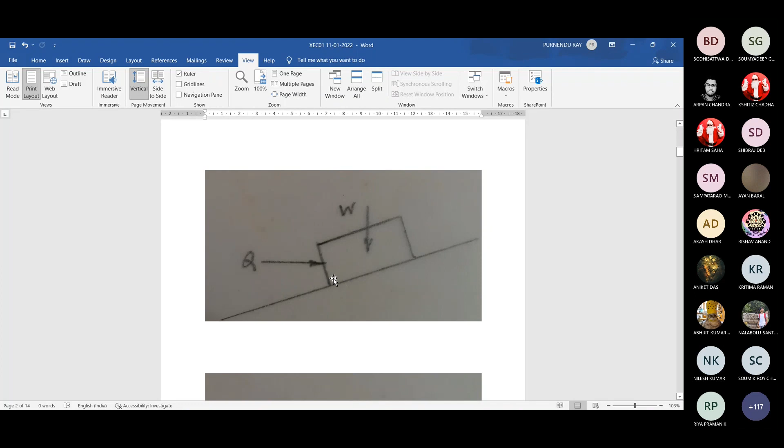And in this case, automatic sliding is not possible due to this low angle theta, which is less than phi. We are giving some motivation for downward movement, and when it reaches that limiting force, it starts sliding down. Now this force is not like the other one, where it can slide upward after reaching some threshold value. Here it is not possible. So we must understand these two different cases.

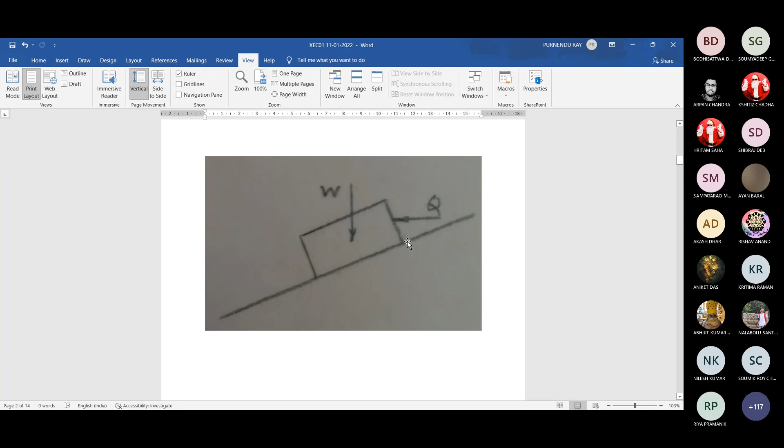Here the angle is low, not sliding down. Angle is high, sliding down automatically. It has been stopped by some minimum value Q. We increase the value Q, then after some time it starts sliding upward. For this case, it is not sliding down. This force Q is applied horizontally to generate that sliding motion.

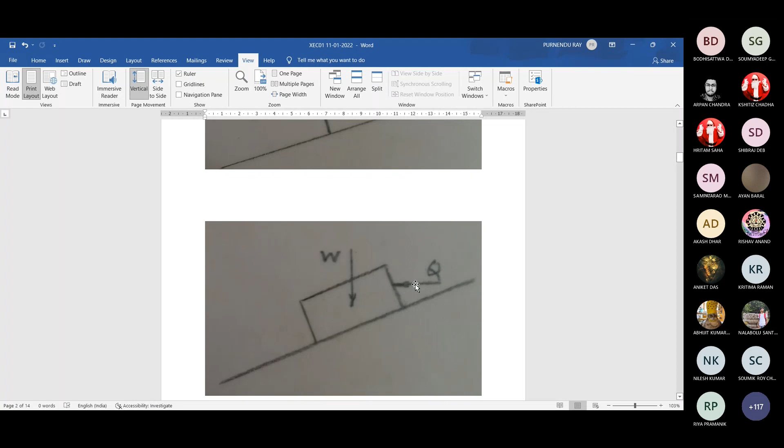Now, for these two simple situations, can you write down the equations of equilibrium and solve them? For some given numerical value of W, some numerical value of this angle theta, and the friction angle phi, those are given. So first step, find tan inverse mu.

You check that angle. Suppose some friction coefficient is there, not tan inverse phi, that mu. So tan inverse mu will give you the value of the angle of friction. So compare phi with theta. If theta is less than phi, you go for this situation. If it is more than, you go for that to stop it.

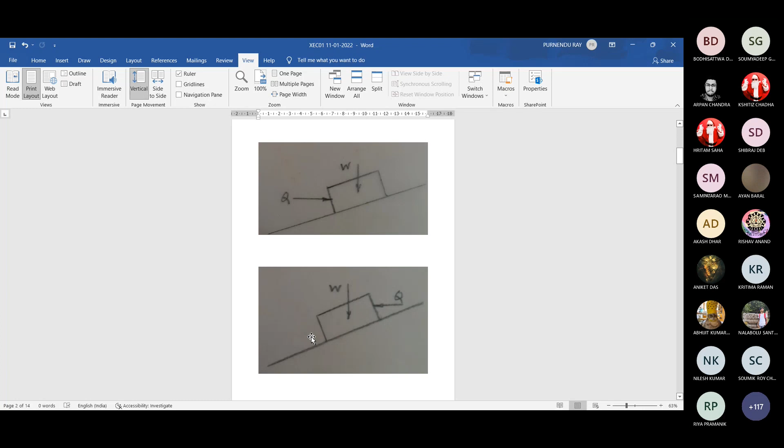Then if you require some more value to start sliding upward, you simply generate those equations of equilibrium. The only thing is the direction of the friction force, either downward or upward along the plane. That's all. And here it is only one situation. It is not sliding down automatically. This is the helping force, and find the minimum force to help it slide down. Okay. Now please go through all such problems on friction.

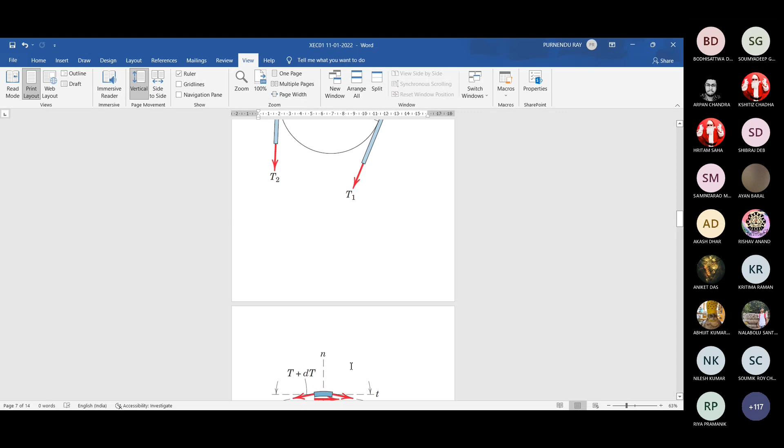Then we discussed belt friction. I hope you have gone through this free body diagram, the equations of equilibrium, the derivation and the final relation. T2 divided by T1 is an enormously high value, e to the power mu beta. Mu is the coefficient of friction and beta is the wrapping angle between the belt and the drum, the angle of contact at the center. And you will find varieties of problems on this.

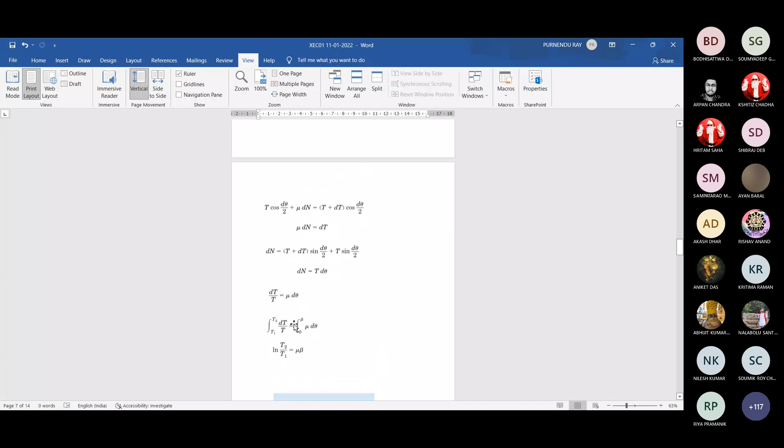Please do some practice, but before the examination it will not be wise for you to, I'll not say waste time, just don't use your time there. It will be an inefficient and ineffective use, because this is not in your syllabus for the exam on the 15th. Next, we are talking about the screw jack.

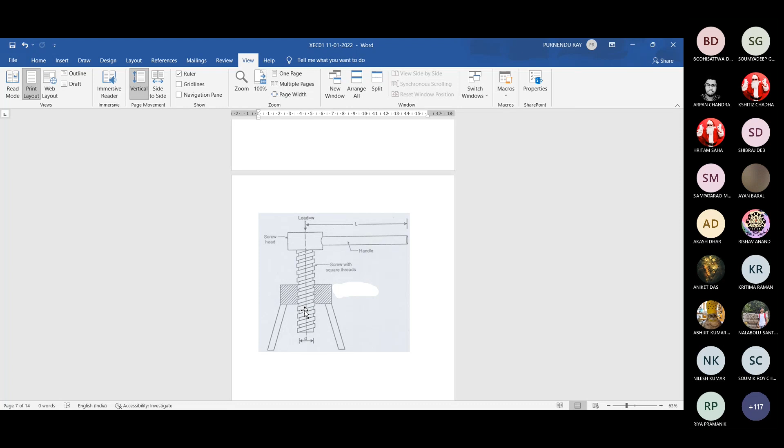Now I will advise one thing about study habits. Normally some people have a household library, but most of us have very few books at hand at home. Normally we go to the school libraries, and unfortunately you cannot avail the library facility of your institute, NIT. But at least the big facility is there, that is the internet, and from there you can get so much very useful information. One search you should do, not right now: different types of threads.

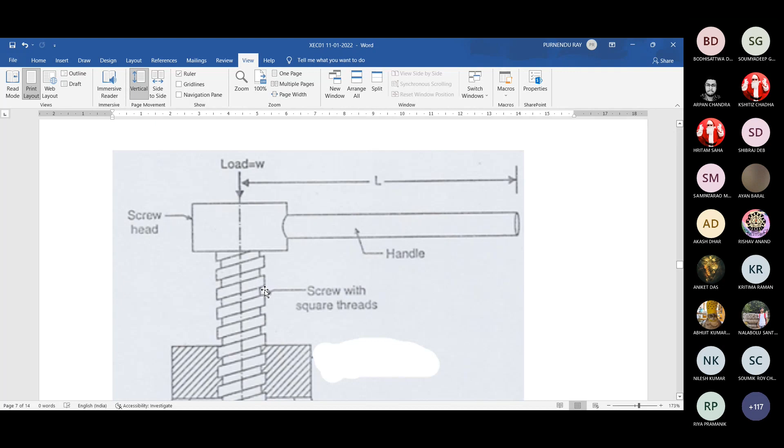And here I'll just make it bigger. Can you see this word written? Square - screw with the square thread. There are different types of threads, and particularly we use the square thread, so that the depth of the thread and width of the thread are normally the same, giving it a square shape.

So you can go through some YouTube video on how different screws and threads are formed, internal, external, etc.

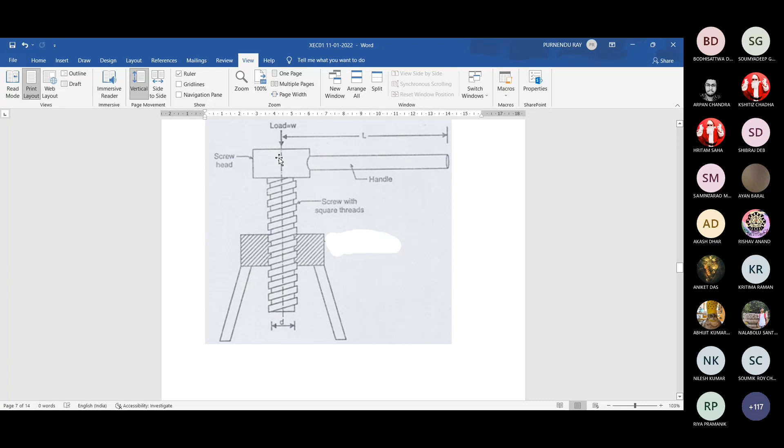What will happen then? A continuous line marked on the outer surface of that cylinder or tube, but the starting point does not come back to its finishing point like the previous line, because along with this circular motion or rotational motion about this axis, there is some linear motion along this axis also. So it comes here for this movement and moves here, continuing again. That is the mechanism by which we get this continuous curved line, the helical line, or the thread lines, the screw lines. That is how we make this thing.

Now when you open this, you will get, like the previous case, the flat open paper with 1 inch divided by width of this paper, that slope. Now in this case, what about the slope of these threads?

Again, that 1 inch like thing divided by this. Now if it is some opened up tube, then what about this length? It is twice pi r, 2 pi d by 2, circumference. Okay, so it is twice pi r. And what about this distance? 1 inch.

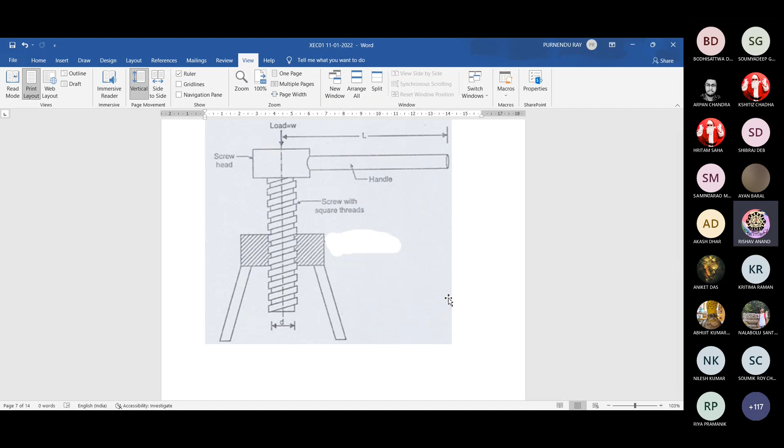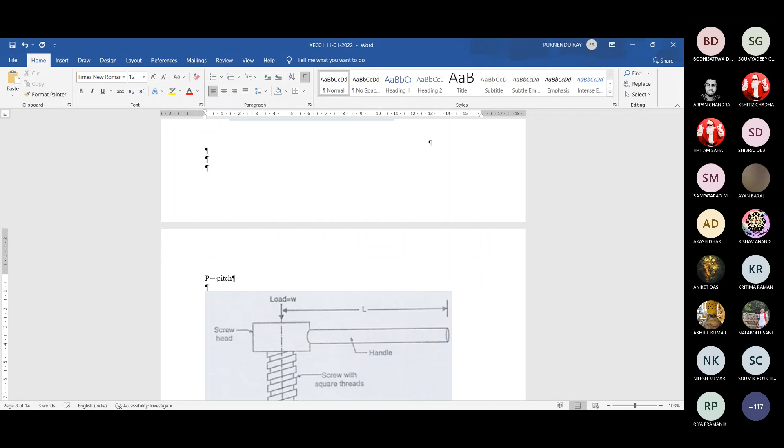It is 1 inch, but when we are talking about this type of threads, there is a special name for that. Can anybody tell me quickly? Pitch, sir, it can be. Pitch, sir. It is pitch, and there is another name too. And sir, L, sir, L. Now what is the full form of that letter L, the abbreviation? Sir, I don't know. Anybody?

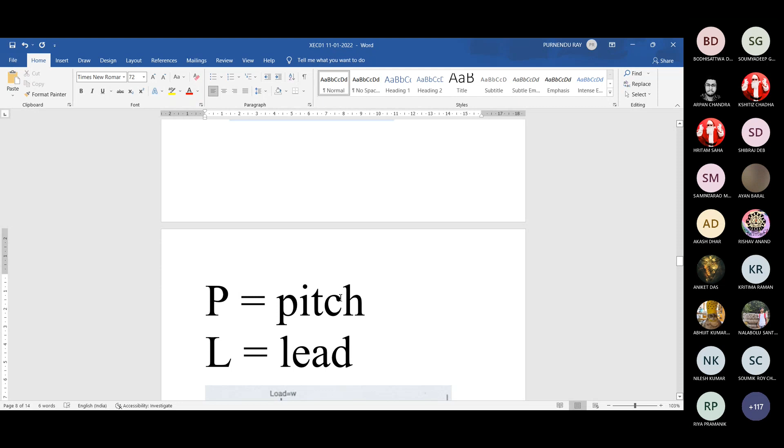Now pitch is, along the axis of that threaded part, the distance between two successive peak points or identical points. Maybe from this point to this point, this is the pitch. And lead is the axial advancement of this threaded system for one complete turn. So if you rotate through twice pi, 360 degrees, then it will move upward or downward, something like that bottle cap where threads are used. There, axial movement for one complete turn is called the lead.

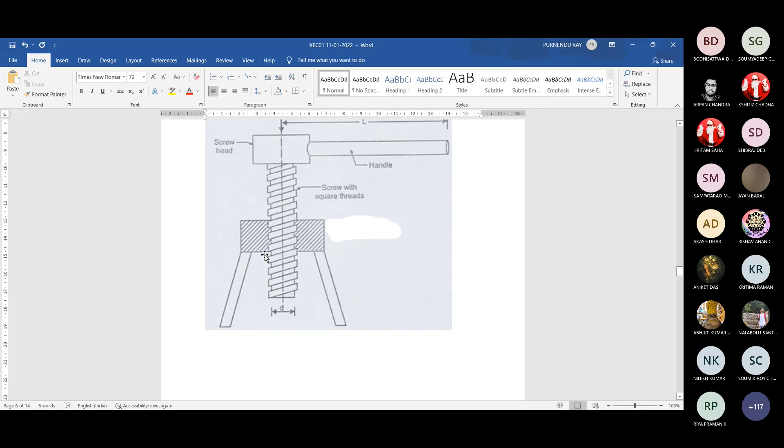And the simplest type of thread, the single screw or single start, gives us lead equal to pitch, P is equal to L. But there may be separate thread lines. Suppose two such independent helical lines are there, non-intersecting but placed centrally, one between the other. So the thread starts from this point, comes here, and comes back here. And the second thread starts from this point, moves here, and comes here. So for two separate threads, identical points are at a distance P, but advancement will be double that pitch. So it moves here for a half turn and comes back here for the remaining half turn. So in that case, L is equal to twice P.

And when we have multiple independent thread lines, it is called multiple start. Otherwise it is single start. So for single start, P is equal to L. For multiple start, lead is equal to N multiplied by P, where N is the number of starts or independent threads. So for a 2-start thread, L is equal to 2P. For a 3-start thread - now can you give any example for that?

You will find many bottles in the market. So you are... You are muted, sir. Muted, sir.

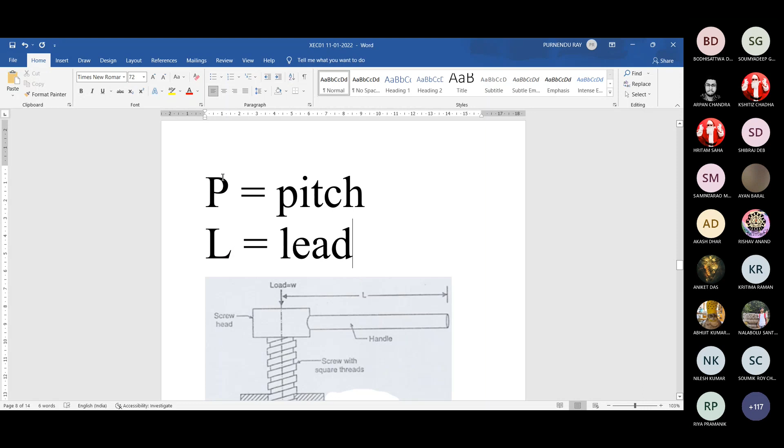I think it's a nice signal for me, sir. Time is up, please finish it. Anyway, for your learning from the internet, just go through these things: lead, pitch, multiple start, single start, threads, etc., and some detail about this. In our next class we will discuss the screw jack part. And yes, please practice this: T2 divided by T1 is equal to e to the power mu beta.

Yes, anything? I cannot get that first start, second start, and the difference between the pitch and the lead. Do a Google search today, you'll find many videos. Okay, try it, and after that I'm here.